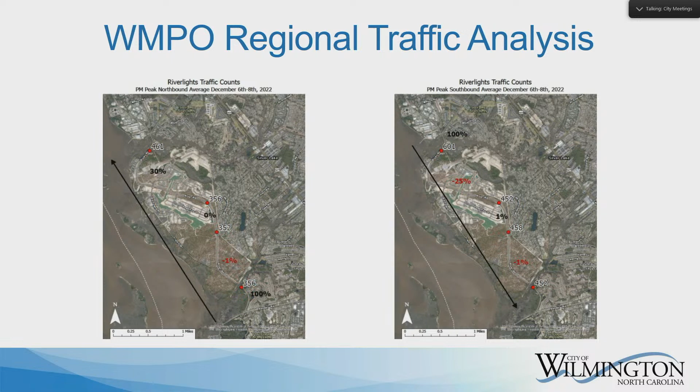The next thing we did was engage Michael Baker to complete several studies. In addition to looking at traffic, we did a pavement condition analysis, looked at the condition of the existing retaining walls in the corridor, and also looked at what improvements may work in the future at the River Road and Independence Boulevard corridor. They completed that study in August of 2022 based on traffic counts from June of 2021 and February of 2022, and included the future build-out of River Lights, known developments at the time along both River Road and Independence Boulevard, and a growth rate to get to 2045 traffic volumes.

When we looked at the analysis, we considered a 4-lane configuration for Independence Boulevard, which included a landscape median, sidewalk on the south side, and a multi-use path on the north side. We looked at River Road as a 2-lane road based on current traffic volumes. The trigger for going from a 2-lane to a 4-lane facility is about 16,000 vehicles per day. Independence Boulevard is currently at 13,000, so it's nearing that.

Can I ask, when you're talking about a 2-lane River Road, what part of River Road? South of Independence Boulevard through River Lights. Where we already have the right-of-way to do the extra two lanes once it gets into River Lights? Yes, once it gets into River Lights. But the analysis assumed that River Road would remain a 2-lane road while Independence Boulevard would be widened to 4 lanes. Okay.

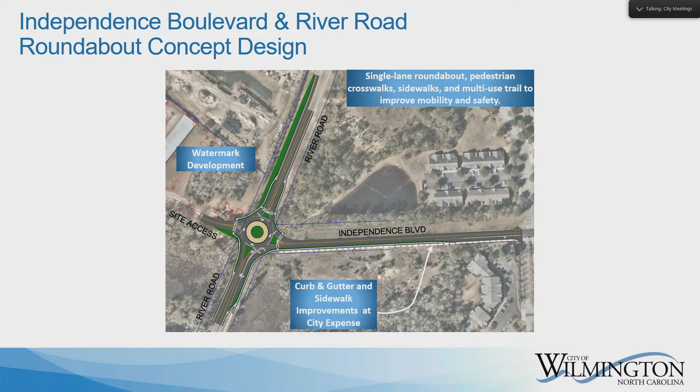This is a more zoomed in view of the concept plan, which shows a roundabout with a diameter of 110 feet. This is called the inscribed circle of the roundabout, a travel lane of 16 feet, and a truck apron of 17.5 feet. I think it's important to recognize that these roundabouts are designed for trucks to drive on that truck apron. Larger vehicles are supposed to use the truck apron, that's what it's there for. It allows them to maneuver the roundabout without getting stuck or blocking traffic. It has an intended purpose.

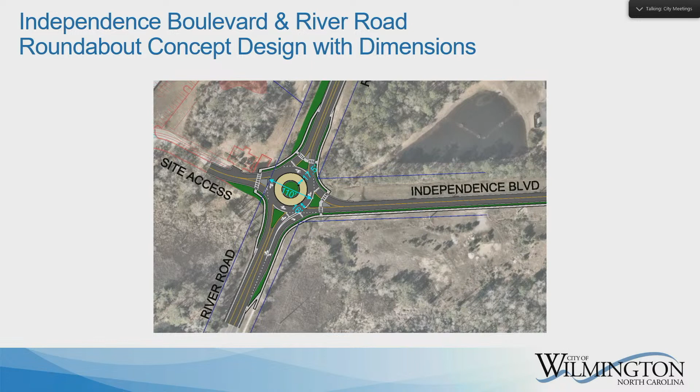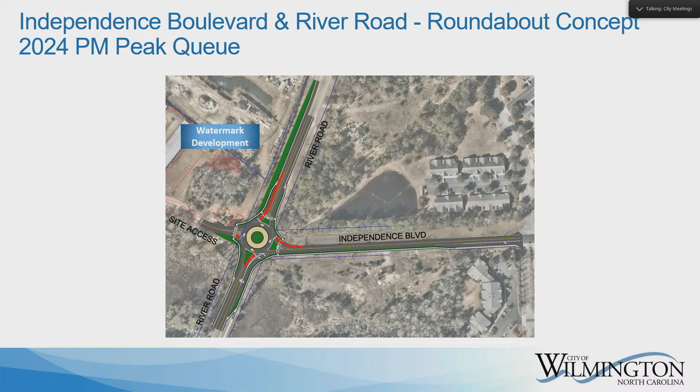So what we're seeing now is the PM peak hour simulation, and similar to the AM peak simulation, the traffic signal works, there is queuing. The roundabout definitely keeps traffic moving more continuously through the intersection, but the traffic signal does work at this location in 2024.

Well, I've seen roundabouts that are like two-lane roundabouts. When we get to that point, the trigger point to do the 4-lane on River Road, will this have to be... it'll stay the same?

My understanding is that what would need to be added in 2045 is similar to the slip lane we have on the northbound right turn movement to Independence Boulevard. We would have a similar slip lane that would take traffic heading west on Independence to go north on River Road.

Anything you need to add there? No. Okay, so it doesn't go to a full dual-lane roundabout, it simply gets an additional slip lane in the northbound direction. Thank you. And we have located the center median of this roundabout so that it works with both the existing 2-lane configuration and that future configuration as well.

So now we're going to look at the 2045 simulations. This is where you start to see the queues for the traffic signals starting to lengthen out, whereas the queues for the roundabout stay relatively short.

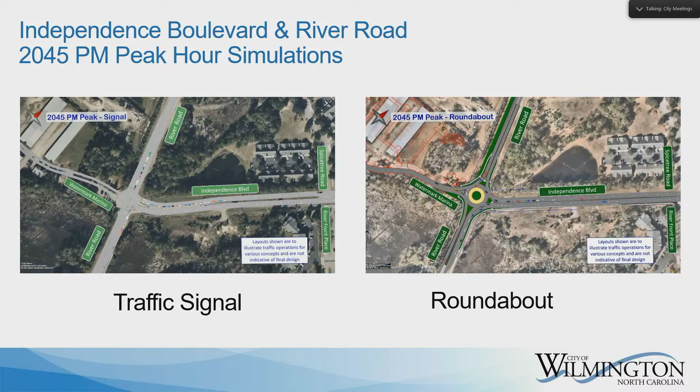The next slide I want to get into is a little bit on turning movements through the intersection. These are what are called auto turn templates, and they are templates of what vehicles look like as they move through an intersection. They're based on truck traffic movements. And what you're seeing here is a WB62, which is a very large tractor trailer, the kind typically seen on an interstate.

But because of the proximity to the port and the ongoing construction and river lights, we felt it was important to demonstrate that a WB62 could make its way through the intersection. Typically, you're going to see things more like box trucks, single unit trucks, delivery vehicles, but we did want to demonstrate that this could happen.

They're designed to use the truck apron, and you can see that the truck apron is being heavily used by the movements on this auto turn configuration. The detailed design will make sure that vehicles can move safely through the intersection. This is concept plan level only.

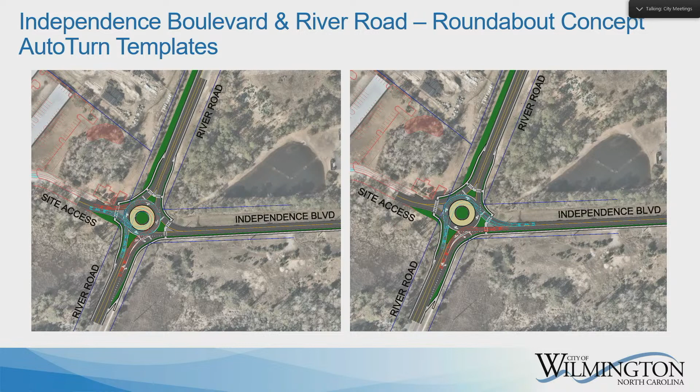So these are just some additional auto turn templates of trucks moving through the intersection in the other directions. And here's another graphic showing how trucks are intended to use the splitter islands and the truck apron.

We have a roundabout video that NCDOT put together. A roundabout can be intimidating the first time you approach one, but they are designed to be safer and more efficient than traditional intersections with stop signs and traffic signals because they keep traffic moving. By following a few simple rules, drivers, pedestrians, and bicyclists can all navigate a roundabout safely.

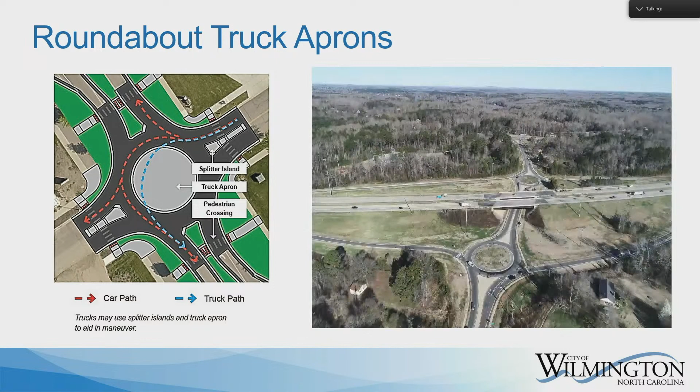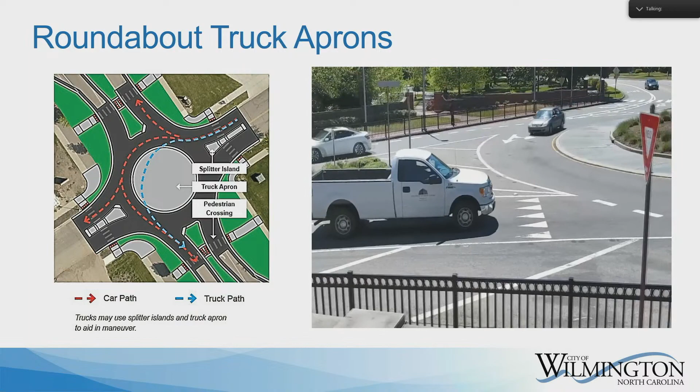When you approach a roundabout, slow down, watch for pedestrians, and look to your left for oncoming traffic. As you near the yield sign and dashed yield line, yield to the traffic already in the roundabout. Everyone using the roundabout moves in a counterclockwise direction, and drivers already in the roundabout do not yield to vehicles approaching the circular intersection. Once you see a gap in traffic, enter the circle and proceed to your exit. If there is no traffic in the roundabout, you may enter without yielding. Once inside, stay in the same lane, obey all signs, look for pedestrians, and use your turn signal before you exit.

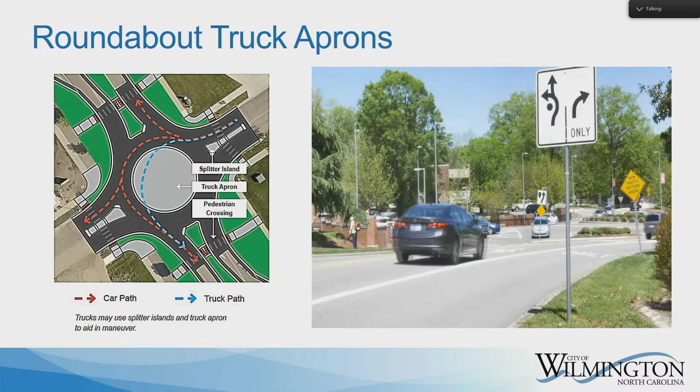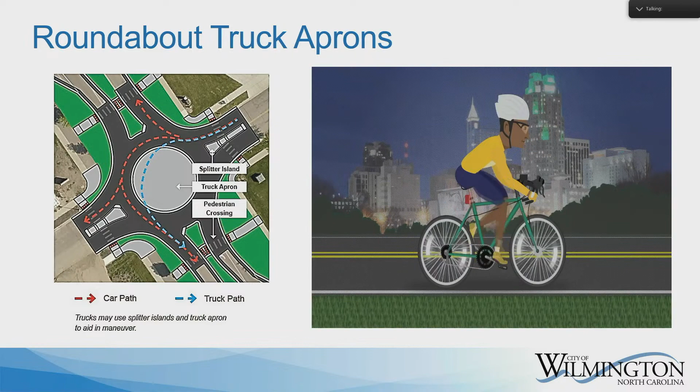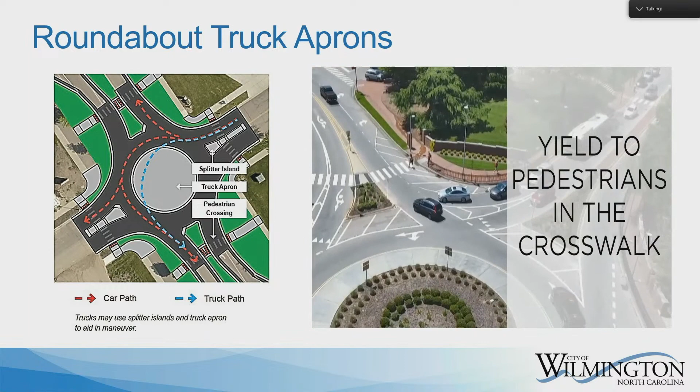NCDOT builds two types of roundabouts, single lane and multi-lane. Once inside a single lane roundabout, simply exit at the desired street. When approaching a multi-lane roundabout, observe signs and pick the appropriate lane before entering. Remember to give larger trucks and buses extra room. Never enter the roundabout while an emergency vehicle using lights and sirens is passing through. If you are already in the roundabout, exit as soon as possible, then pull to the right to let the emergency vehicle pass. Bicyclists navigate roundabouts in a similar manner as vehicles and should stay in the middle of their chosen lane. Drivers should not pass a bicycle in a roundabout, and they must yield to bicyclists already in the roundabout. Drivers also yield to any pedestrians using the crosswalk of a roundabout. As more roundabouts are constructed across the state, knowing how to use them will help keep North Carolina moving.

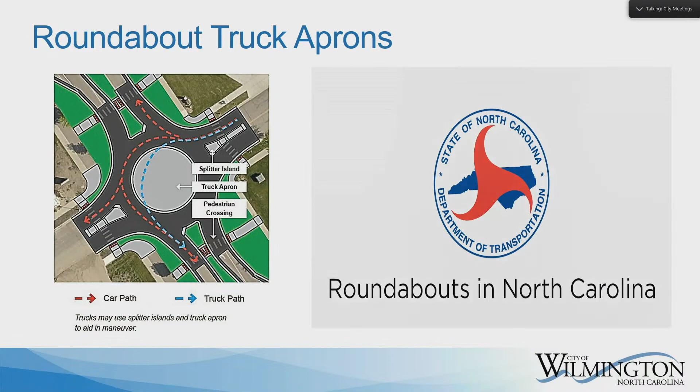And if you notice in that last roundabout video, you could clearly see the truck pavement markings going across that apron. The next slide is going to go into a little bit of roundabout safety.

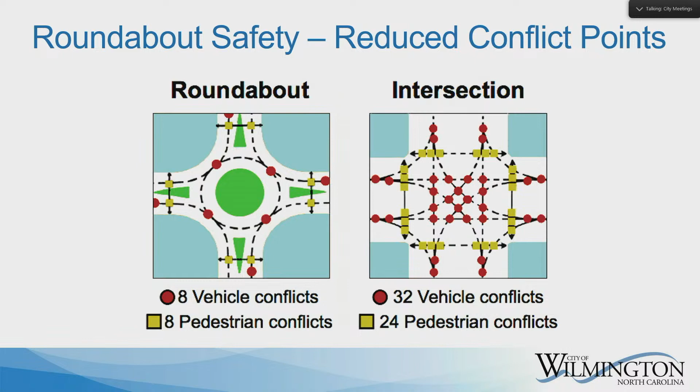Conflict points, both vehicular and pedestrian, are significantly reduced through the use of a roundabout versus a traditional four-way intersection. Vehicle conflicts are reduced from 32 to 8, and pedestrian conflicts are reduced from 24 to 8. Pedestrians at roundabouts are crossing only one direction of traffic at a time, so they only have to look in one direction to see if it's clear. They get to the refuge island, the splitter island, and then they look in the opposite direction. The vehicle can see them, and they can see the vehicle coming before they cross that next leg of the roundabout.

And some of the statistics on roundabouts reducing crash severity: modern roundabouts reduce severe crashes by about 80%, and reduce all crashes by 35 to 47%.

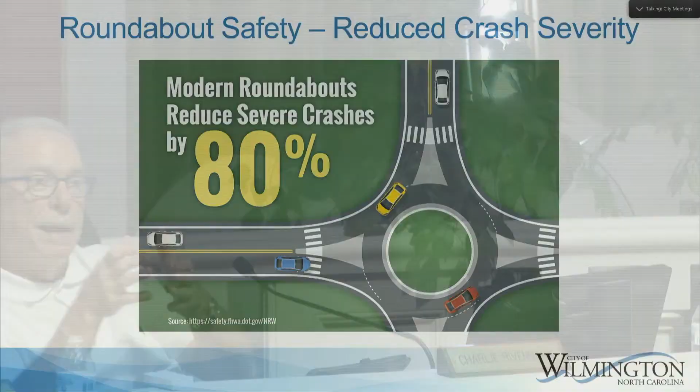A roundabout collision is more of a glancing blow, versus severe crashes like right angle, left turn, and head-on collisions, which are unlikely unless somebody is not following the roundabout rules.

You have lower speeds and better angles for crashes. Here's more information about the educational roundabout benefits - some of the stuff we've already touched on as far as crash severities, the use of the truck apron, but it also goes into life cycle costs and environmental benefits of roundabouts.

If the power goes out, the roundabout still functions. We don't need to have a generator, and we don't have to have somebody fueling that generator. There's fewer idling cars at an intersection.

All of the queues and simulations we looked at today were for the AM peak and PM peak. During the rest of the day, those volumes are significantly lower, so you'd have a lot of cars stopped at a red light with no opposing traffic, whereas with the roundabout, they could just continue to move through the intersection.

There are a lot of instructional videos, flyers, and brochures out there, and we can work with the communications department to get more information out about how to use roundabouts, and make sure they're properly signed and properly striped. I've got one last video from the FHWA we'll share with you, and then I'll open it for questions.

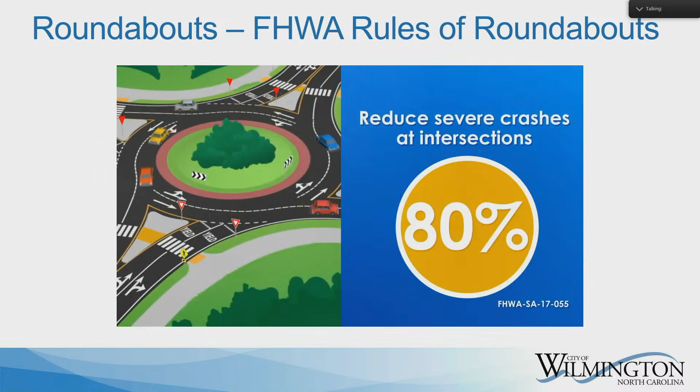If you travel around the United States, there's a good chance you've gone through a modern roundabout recently. They're saving lives on our nation's roads because they reduce severe crashes at intersections by an average of 80%. But do you know the rules of the roundabout? The rules are pretty simple and easy to remember: slow down, look around, and be ready to yield.

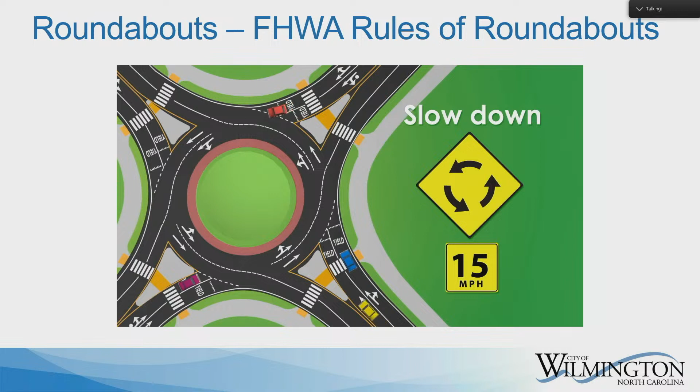When you approach a roundabout, slow down. Going slower gives you more time to make decisions, and you'll be ready to yield to other road users. Next, look around. If there's more than one lane leading to the roundabout, you'll need to choose the proper lane for where you want to go after the roundabout. Take note of the signs and markings to help you select your lane. Like most other intersections, use the left lane to go left, the right lane to go right, and either lane to go straight through, unless otherwise indicated.

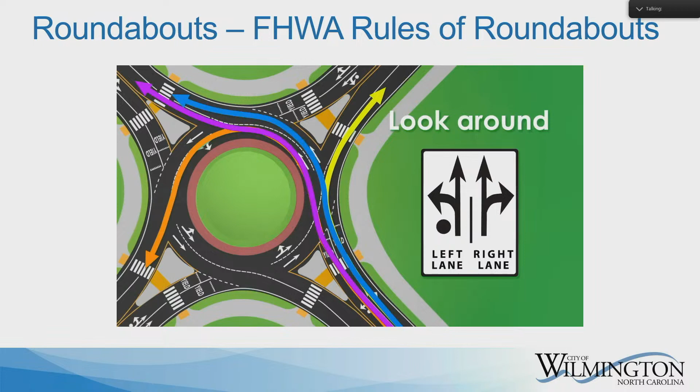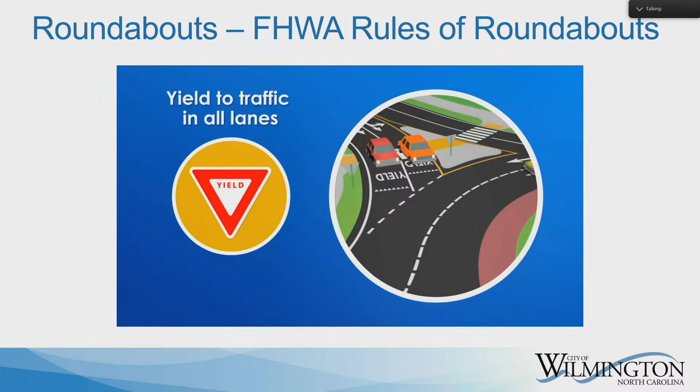Keep looking around and check the crosswalks to see if anyone is waiting to cross or is already crossing. Be ready to stop and let them safely finish. When the crosswalk is clear, look around for traffic already in the roundabout, then be ready to yield. You must yield to traffic in all lanes of the roundabout, not just the lane closest to you. Remember, yielding means letting others go first and stopping when necessary.

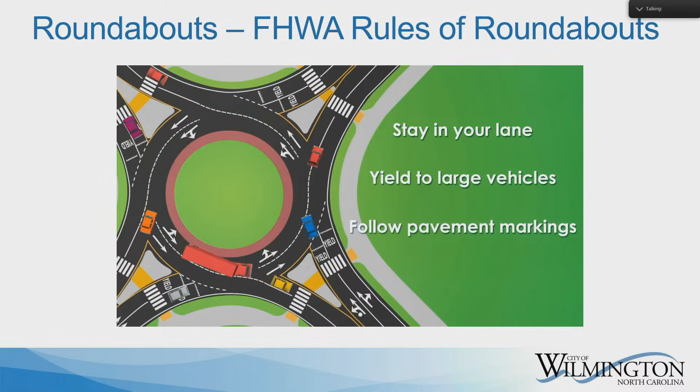Enter when there's a comfortable gap. Remember to go slow and stay in your lane. Don't turn left from the right lane, and don't turn right from the left lane. If you see any large vehicles like trucks or buses, give them space and avoid driving next to them inside the roundabout. As you leave the roundabout, follow the pavement markings to stay in the correct lane. Look around one more time for anyone in the crosswalk and be ready to yield to them as you exit.

That's it. So next time you're at a roundabout, make sure to follow these simple rules: slow down, look around, be ready to yield.

So that's the presentation that we prepared for you. We're happy to answer any questions you may have.

It's anticipated to be built in '24? We are currently in discussions with two developers, River Lights and Watermark. We've got a concept plan for the roundabout. It would need to go through TRC review in conjunction with their development and be constructed with their project - I'd say a year to 18 months from the time their project is approved, though I'm not sure what that timeline exactly is for their approval.

On the traffic coming from the south, going through River Lights, how much of that traffic, when it gets up to Independence, goes north? And how much goes up Independence toward Carolina Beach Road, or toward the port - how much goes to the right up Independence? I don't have an exact figure for you - Dennis is saying about 50% turns right, and the rest goes north.